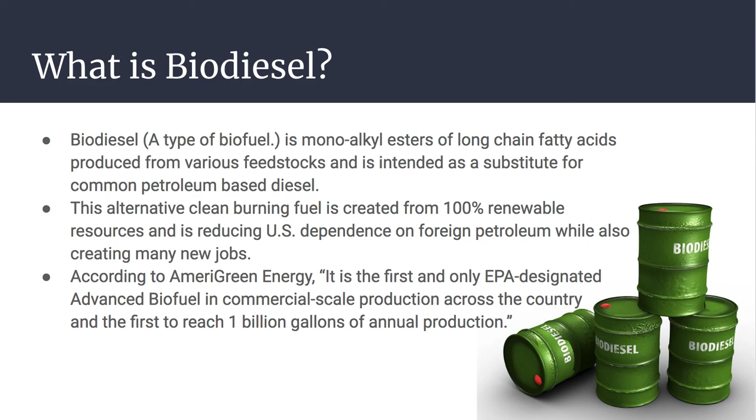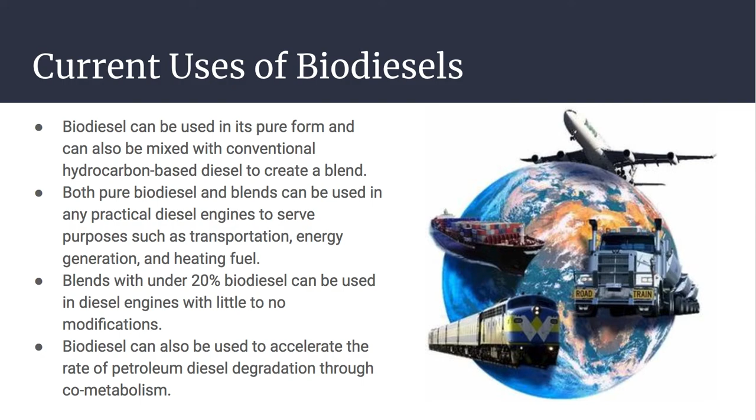Biodiesel can be used in its pure form and can also be mixed with conventional hydrocarbon-based diesel to create a blend. Both pure biodiesel and blends can be used in any practical diesel engines to serve purposes such as transportation, energy generation, and heating fuel. Blends with under 20% biodiesel can be used in diesel engines with little to no modification. Biodiesel can also be used to accelerate the rate of petroleum diesel degradation through co-metabolism.

Biodiesel is one of the easiest alternative fuels to use, and there is a variety of feedstock sources that can be used to produce it. These feedstocks include virgin oil, waste vegetable or cooking oil, animal fats, algae, oil from halophytes, and more. The waste vegetable oil discarded from restaurants is becoming more popular as a feedstock for biodiesel, and many supporters propose that waste vegetable oil is the best raw material for its production, but currently the worldwide production of vegetable oil as a raw material for biodiesel fuel is not abundant enough to substitute for the liquid fossil fuel version of diesel.

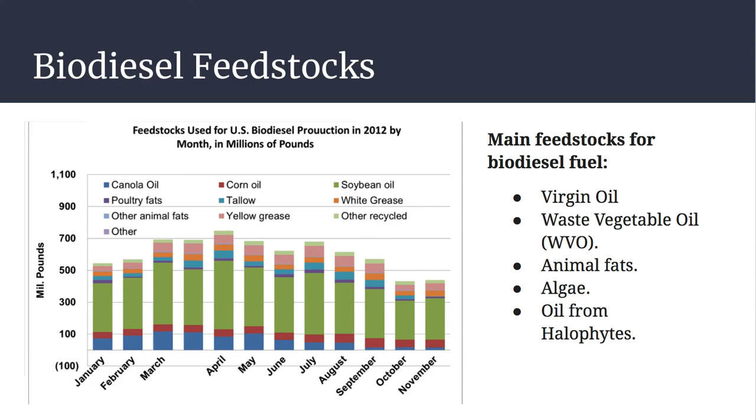Biodiesel is steadily increasing in production and consumption all over the world, with the United States in the lead, producing an average of 940,000 barrels a day compared to Brazil, who's in second, producing around 450,000 barrels per day. Consumption has seen a rapid increase from 2010 to the present, with the United States consuming a little over 2,000 million gallons in 2016.

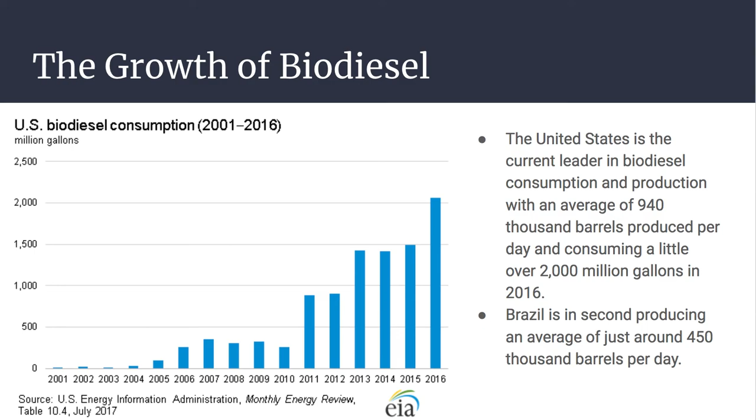The use of biodiesel is known for being environmentally friendly, which is true because of its decreased greenhouse gas emissions, overall lower pollution, and its faster biodegradation. This biofuel has been studied to have 45 to 65% lower greenhouse gas emissions than conventional petrol diesel, depending on the feedstock it was produced from. Biodiesel is also the only alternative to have effectively completed the health effects testing requirements of the Clean Air Act of 1990.

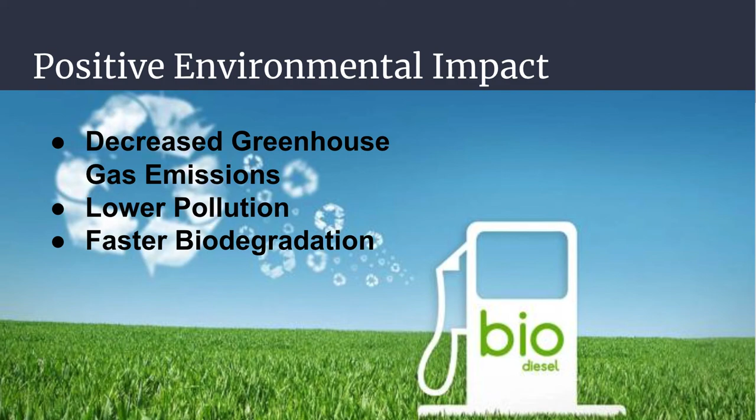Carbon dioxide gases are actually recycled through this process, and according to Berkeley Biodiesel, the plant feedstock used in the making of biofuel absorbs carbon dioxide from the atmosphere when it grows, and once the biomass is converted into biodiesel and burnt as fuel, the energy released is used to power an engine while the carbon dioxide is released back into the atmosphere. Biodegradation rates are also impressive, with around a 5 times faster rate than petroleum diesel studied over a span of 28 days, and through co-metabolism, biodiesel blends can assist and accelerate the rate of petrodiesel.

The only negative impact on the environment due to biodiesel production is deforestation. This occurs if deforestation and monoculture farming techniques are used to grow biofuel crops. Examples of this include tropic forests being cleared to make room for oil palm plantations. This can in turn damage biodiversity and ecosystems by threatening many species of plants and animals.

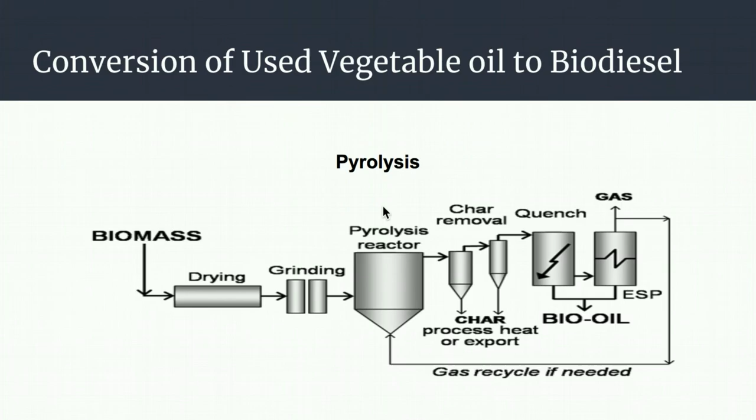Conversion of used vegetable oil to biodiesel is an important process for the production of biodiesel. Pyrolysis and transesterification are possible methods for conversion. Pyrolysis is a method conducted at a high temperature with or without the aid of a catalyst that decomposes plant raw materials or animal fats into a series of mixtures. Alkanes, olefins, dienes, aromatics, and carboxylic acids are the possible products.

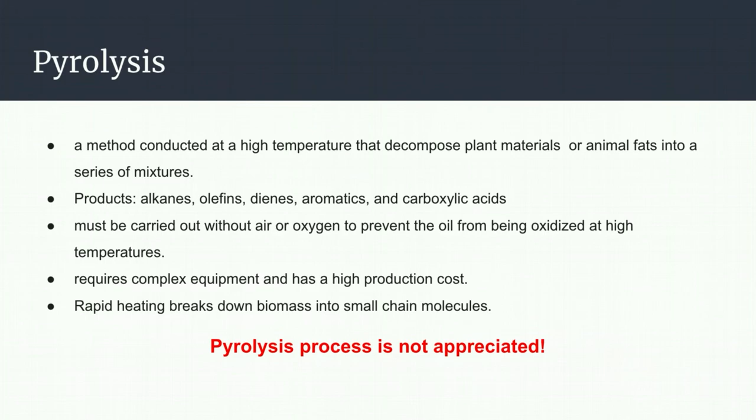This method must be carried out without air or oxygen to prevent the oil from being oxidized at high temperatures. The reaction conditions, such as rapid heating, break down the organic polymers in biomass into short-chain molecules, and these problems lead to the complex equipment and high production cost. Therefore, this method has not been appreciated by researchers due to its low conversion rate, high energy consumption, and poor economy.

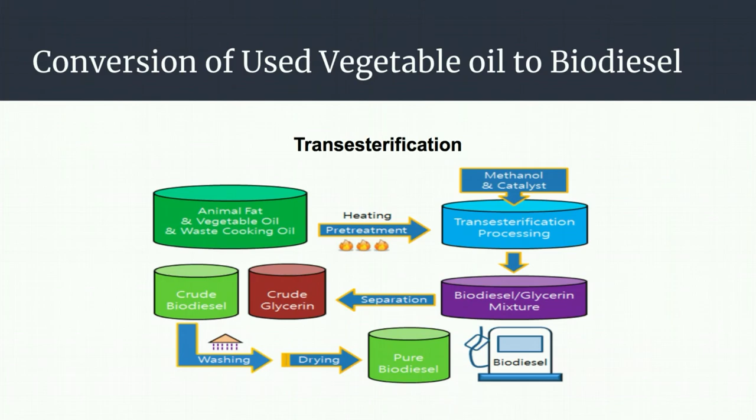Another method that is widely used is called transesterification. Used vegetable oil is first heated to remove impurities. Then they undergo a transesterification reaction in the presence of acid or base catalysts or other new catalysts. Finally, pure biodiesel fuel is obtained by washing and drying the corresponding fatty acid methyl ester or ethyl ester.

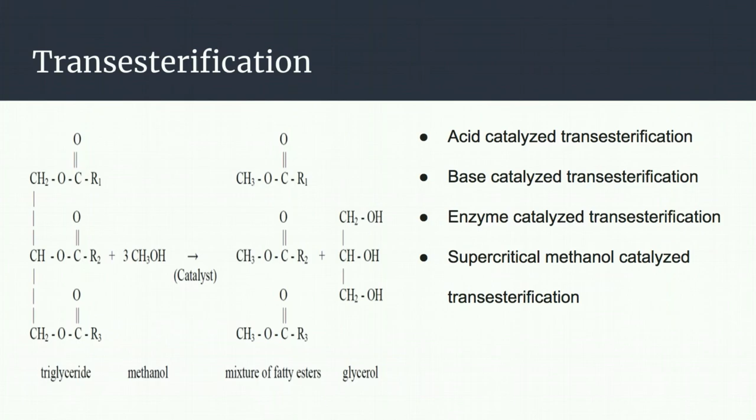The transesterification method can be divided into acid-base catalysts, enzymatic catalysts, and a supercritical methanol process based on the catalytic method. Although the esterification methods are different, their reaction mechanism is the same. The figure on the left shows the schematic diagram of transesterification mechanism. A triglyceride reacts with three molecules of alcohols in the presence of catalyst, producing a mixture of fatty acid alkyl esters and glycerol.

The acid catalyzed transesterification process is a catalytic process by using strong acid to catalyze esterification of free fatty acids. This process has very slow reaction compared to that of base, and it is possible for the high free fatty acids but produces water. Unburned hydrocarbons and carbon monoxide are substantially reduced, and sulfur dioxide emissions are eliminated.

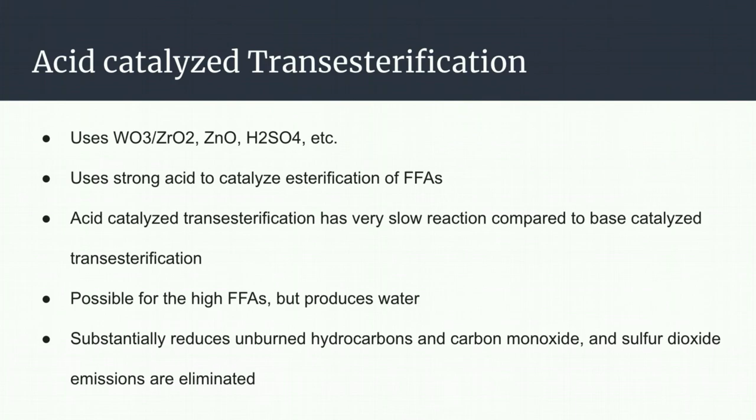The base catalyzed transesterification process is the most widely used technique. This process has faster reaction compared to that of acid, and this fast reaction leads to less corrosive. Recycling catalyst and possible formation of soap is challenging these days.

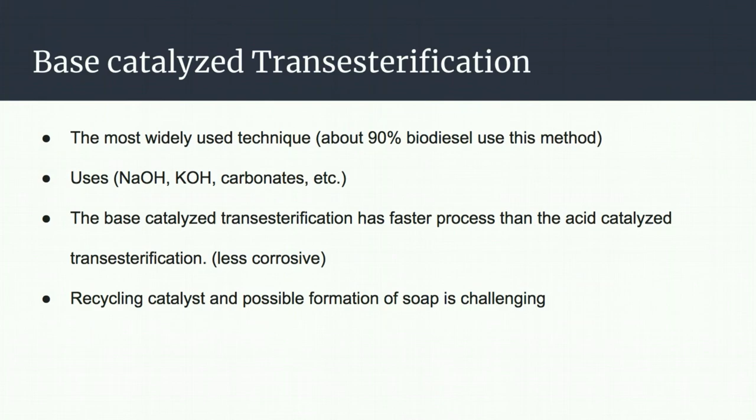The enzyme catalyzed transesterification uses enzymes to produce esters from triglycerides at relatively low temperature and pressure. It has relatively longer process compared to other reactions. The catalyst separation issues are solved easily, but the expensive catalyst is the disadvantage for this process.

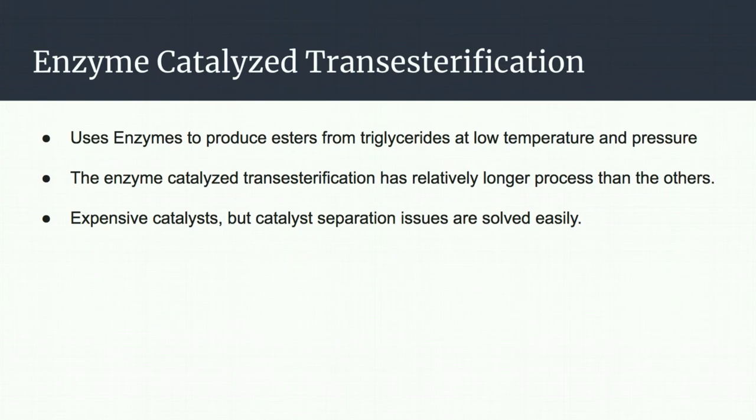The supercritical methanol process is a non-catalytic process. This process is an economical, efficient, and environmentally friendly method for producing biodiesel fuel compared with the conventional commercial method. Moreover, no soaps are generated, and separation and purification of the products are easy. Unlike the other methods, this method can also be applied to relatively long-chain alcohols due to the non-catalytic process.

Now I'm going to speak a little bit about the characteristics of biodiesel and how they compare to regular diesel. These characteristics include chemical composition and important fuel properties. For the chemical composition, HNMR spectroscopy tests for the presence of fatty acid methyl esters in biodiesel. FAMEs are what makes up biodiesel. IR spectroscopy is used to test for the presence of glycerol in the fuel. Gas chromatography coupled with mass spec determines the composition.

For the fuel properties, the most important fuel property to consider is viscosity. Other properties included are cetane number, heat of combustion, and the cold flow properties such as cloud point and pour point.

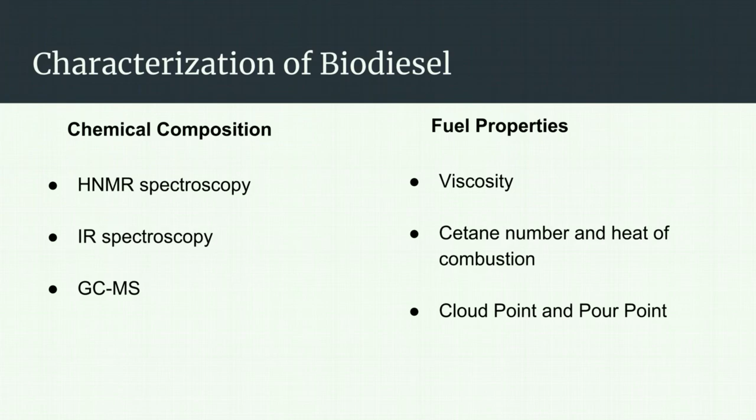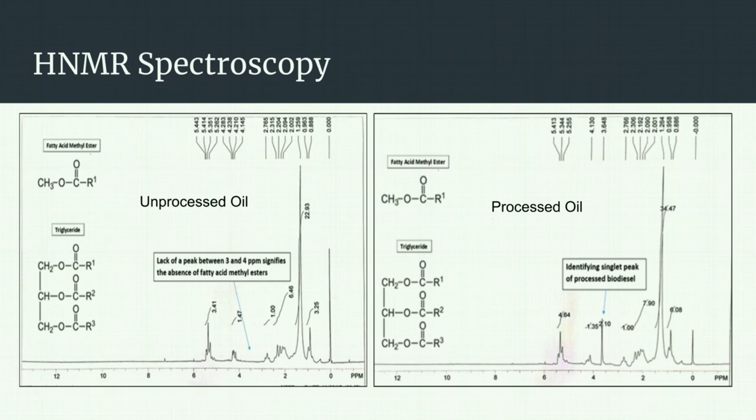These graphs here are HNMR spectra of vegetable oil before and after the transesterification reaction. This data was actually collected by me during a project in a chemistry lab. Both the processed and unprocessed oil have almost the same hydrogen setup, which makes it difficult to distinguish between the two. The only real difference between the two is the singlet hydrogen on the FAME, which exists only for fatty acid methyl esters and not triglycerides. This is the characteristic peak that proves the transesterification reaction was successful and biodiesel was formed.

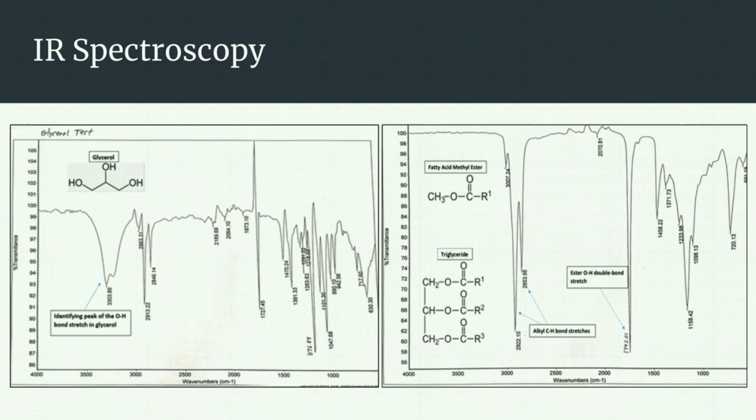In order to purify the product, the biodiesel mixture is centrifuged to remove the solid glycerol byproduct. The graph on the right is an IR spec of purified biodiesel. It's not very useful in determining if fatty acid methyl esters are created due to the similar structural nature of triglycerides and FAMEs. The graph on the left is an IR spec of the solids produced from the transesterification reaction. The graph very clearly shows the characteristic peak of the glycerol byproduct formed when fatty acid methyl esters are created. The data was also collected by me during a project in the chemistry lab.

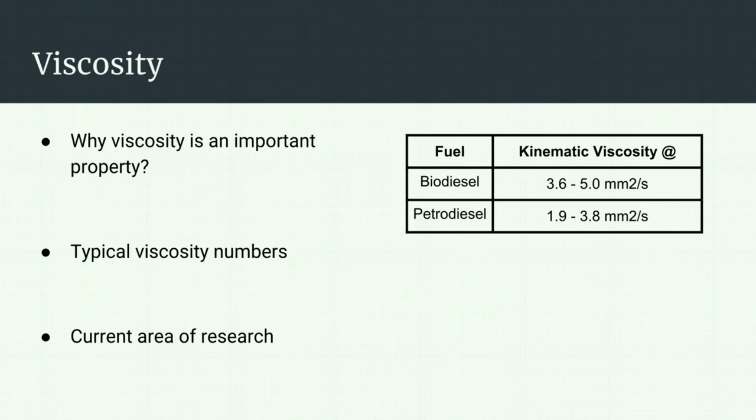As I mentioned before, viscosity is the most important property of biodiesel. It affects the operation of fuel injection equipment, particularly at low temperatures when the increase in viscosity affects the fluidity of the fuel. The typical viscosity of biodiesel is 1.3 to 1.6 times higher than that of traditional diesel. Lowering the viscosity of biodiesel without changing any of its fuel properties is currently a growing area of research.

Cetane number is a measure of ignition quality or ignition delay and is related to the time required for a liquid fuel to ignite after injection into a compression ignition engine. High cetane number implies short ignition delay.

The cetane number of biodiesel depends on the distribution of fatty acids in the original oil or fat from which it was produced. The longer the fatty acid carbon chains and the more saturated the molecules, the higher the cetane number. The broad range of cetane numbers for biodiesel commonly cause issues with the timing of engines.

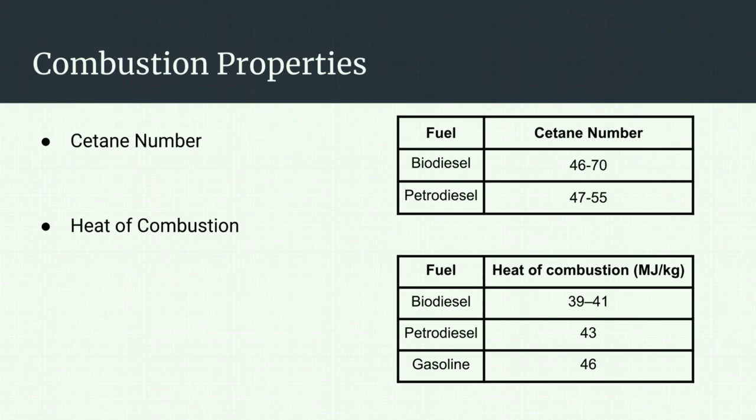The heat of combustion of a fuel measures the energy content. Higher is generally better. The table here shows the heat of combustion for biodiesel, regular diesel, and gasoline. The heat of combustion for biodiesel is slightly less than regular diesel. This is because biodiesel is an oxygenated fuel. This means it's a fuel with less energy but burns more completely.

Some of the cold temperature characteristics of biodiesel are cloud point and pour point. Cloud point is the temperature at which a cloud of crystals first appears in a liquid when cooled. Pour point is the temperature at which the amount of wax out of solution is sufficient to gel the fuel. Thus, it is the lowest temperature at which the fuel can flow.

Both cloud point and pour point are considerably higher than regular diesel. This is also a large area of research into biodiesel. For this reason, a fuel that is 100% biodiesel cannot be used in a combustion engine in colder climates.

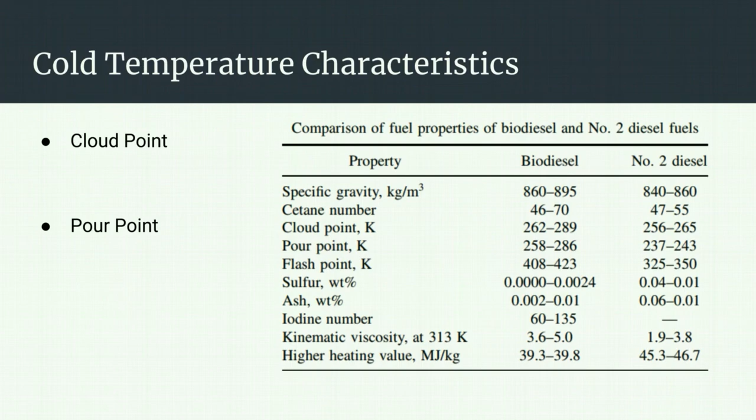Although there are many advantages both to consumers and the environment to using biodiesel, there are some disadvantages as well. One of the main advantages of biodiesel is that on average it is cleaner than fossil fuels. However, biodiesel does have about 10% more nitrogen oxide emissions than fossil fuels. This could cause an increase of both smog and acid rain in largely populated areas.

One big problem is that the oils in the biodiesel will turn to gel at around 40 degrees Fahrenheit, whereas diesel has a gelation point of around 4 to 13 degrees Fahrenheit. There are slight differences of the gelation point due to the varying compositions of biodiesel. The various compositions of biodiesel also pose more complications.

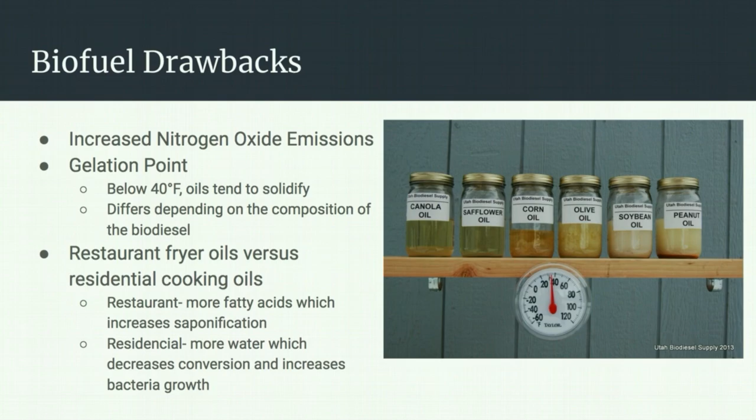For example, restaurant fryer oil contains more fatty acids that will increase the chances of saponification, or the creation of soap. Residential cooking oil, on the other hand, contains more water. An increase in water impedes the biodiesel reaction, which can lead to only a partial conversion of the oil into biodiesel. Water in biodiesel can also cause a decrease in the heat of combustion, an increase in bacterial growth, and deterioration of fuel system components.

Biodiesel can only be used in diesel-powered vehicles, and there are still a lot of complications when it comes to using biodiesel in a car. Besides the gelation point limiting the use of biodiesel to warm temperatures, there are also precautions that need to be taken in terms of the equipment in the car engine. Currently, cars are only allowed to use a maximum of B20, or a biodiesel diesel mix that contains only 20% biodiesel.

Degradation of rubber hoses and gaskets is another huge concern when it comes to using biodiesel in car engines. Biodiesel has been proven to be incompatible with both butadiene and nitrile rubber. Biodiesel also cleans dirt from the engine, which means that the filter must be changed after the first few hours of using biodiesel, so as to avoid a buildup of dirt and the clogging of a filter.

The ignition timing of a vehicle must also be adjusted, since biofuel mixtures and straight diesel have different compositions and therefore ignition temperatures. Biodiesel has also been known to lead to slightly lower miles per gallon than standard diesel due to the low energy content. Animal-based biodiesel averages about 10.6 less miles per gallon than petrodiesel.

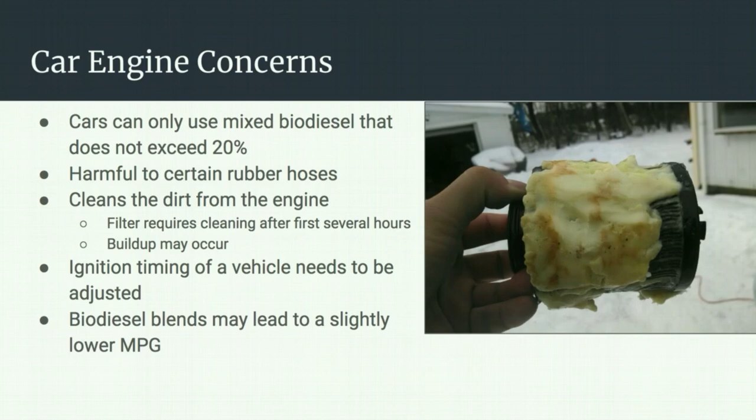There are several ways to combat these disadvantages. Fuel additives can be used in order to reduce the deposit levels. Cold flow additives can also be used in order to lower the gelation point, but these additives must be matched based on the composition of the fuel, which can mean more time, energy, and money.

Another possible solution is filtering or skimming off the gelatinous part of the biodiesel in order to separate it into various batches according to the temperatures at which they can be used without turning into gel. The last possible solution, as I mentioned previously, is biodiesel mixing. This can be used in order to lower the gelation point and decrease the problem with car engines.

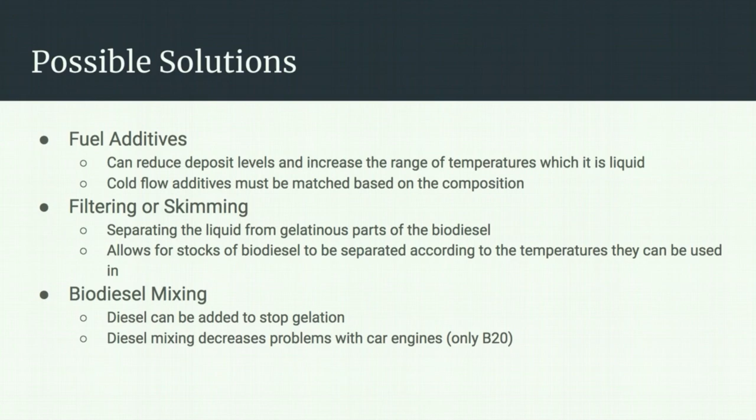The cost of feedstocks is a major restricting factor in the development of biodiesel because the most common commercial process of biodiesel production is homogeneous alkali catalyzed transesterification, using refined vegetable oils as raw materials. Each finished gallon of biodiesel produced will require slightly over 1 gallon of feedstock, either new vegetable oil or filtered waste fryer oil from restaurants.

Prospective biodiesel producers should consider the amount of fuel they hope to produce, and then be certain that they will be able to obtain and handle the necessary feedstock oil on a regular basis. As production volumes increase, the logistics of collecting large amounts of waste fryer oil might become more cumbersome. In addition, as more people produce biodiesel, there might be competition for waste fryer oils. Lastly, it should be noted that working with used cooking oil is somewhat more complicated than virgin oils due to the varying acidity, moisture content, and quality of used oil.

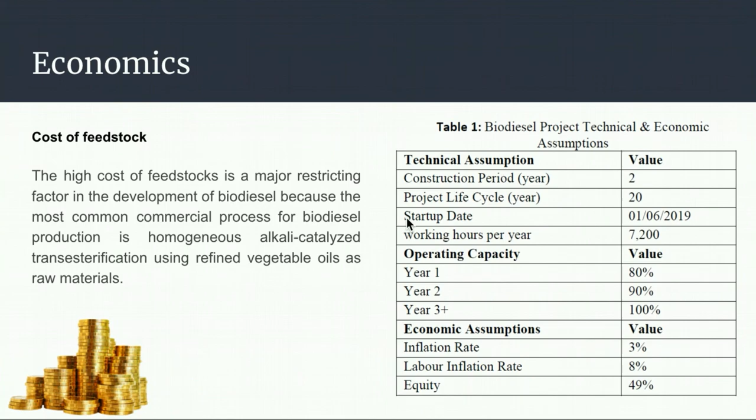The assumptions made for our product will be executed by 49% equity, 51% debt, with loan interest 9%, which is a high value, as in most products the loan interest is 6%, and the debt repayment period or payback will be 8 years. So our product is designed to process 101,000 tons of used cooking oil and 26,800 tons of methanol to produce 100,000 tons of biodiesel.

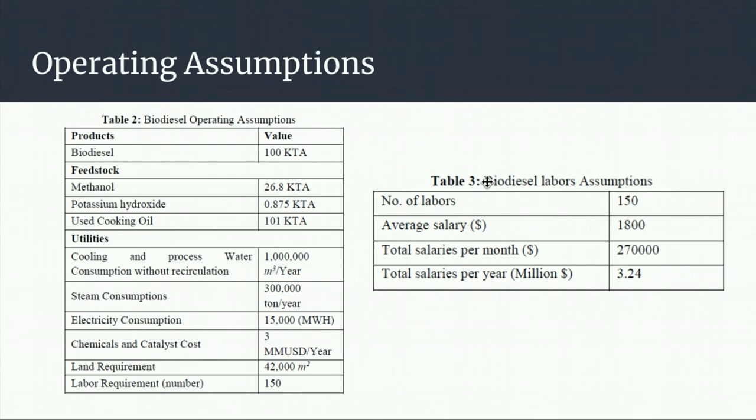Those were our assumptions. The amount of cooling water and process water used during our production will be at most 1 million cubic meters per year, and steam for heat exchanging will be around 300,000 tons per year. Our chemical cost will be at most 3 million per year and area of land 42,000 square meters, as shown in table number 2. For table number 3, what we did was just making assumptions for the number of laborers, like 150, and an average salary per month and per year.

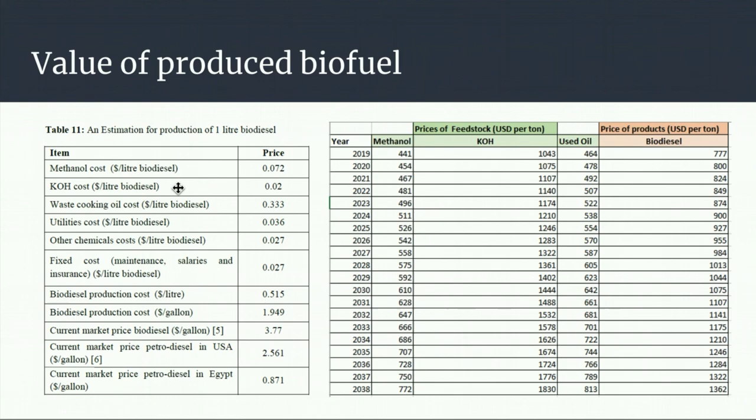Operating costs, as it can be seen, are the expenses related to the operation of the plant. It's divided into fixed and variable costs, and as described in the table, the fixed costs are those incurred whether the plant is in production or not, and are at a constant level regardless of the output produced, such as salaries or rents paid per month. And the variable costs vary at a rate directly related to the production of the plant. They are incurred only when the plant is in operation, although some costs, such as interest, are fixed costs, while maintenance and repair are considered variable costs.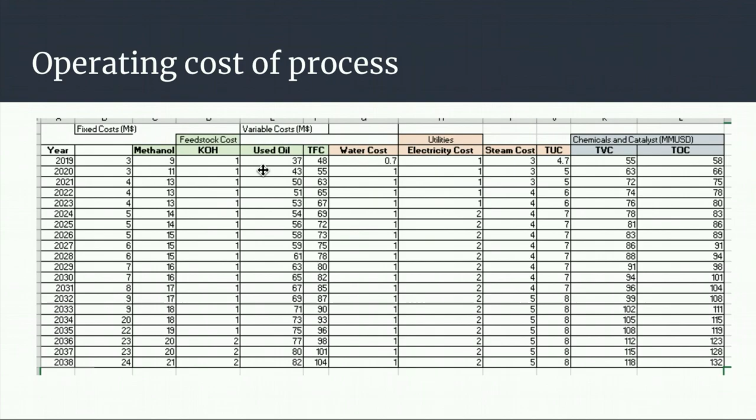As we know by now, the waste byproduct of making biodiesel is raw glycerol. This is the raw form of glycerin, which is used in many chemical applications from explosives to soap. Many people ask what to do with the raw waste byproduct, as commercially glycerin is distilled and purified by a high temperature, high pressure steam distillation process, which is well beyond the scope for most home biodiesel brewers. Now, we will see some uses of the raw glycerol product that have been used by others.

First, we need to know that glycerol is a major byproduct in the biodiesel manufacturing process, and each gallon of biodiesel produced has approximately 1/5 gallon of glycerol. And refining crude biodiesel glycerol into pure is not considered practical on small scales. So one of the uses might be that it can be useful for making soaps and animal feedstuff, and using glycerol as a feed ingredient for animals dates back to the 1970s. However, glycerol's utilization in feed has been limited by its availability.

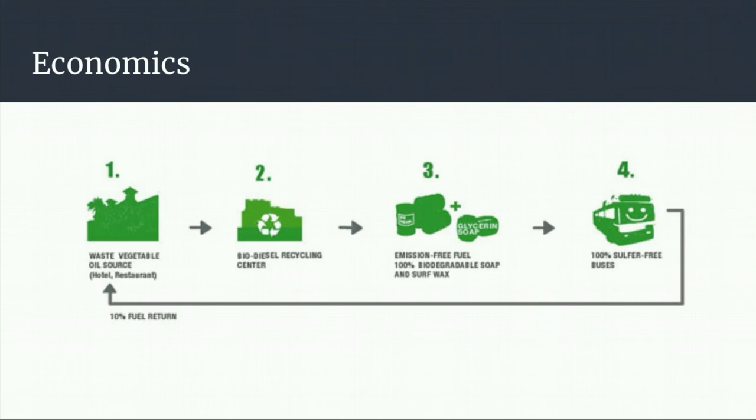Accelerating change into utilization of biodiesel from waste cooking oil will have a great profit and positive effect on environment, vehicle engines, independency on crude oil, investment in economy, as it will increase jobs and save foreign currency, especially that the consumption of biodiesel is very high, as we said before. For example, the consumption of biodiesel is like 13.5 million tons in 2014. It's imported 25% of diesel and 75% from local markets.

Vegetable oil is used directly in the field in either modified or unmodified equipment. It is referred to as straight vegetable oil (SVO) or pure plant oil (PPO). Many cars powered by a direct injection engine supplied by inline injection pumps are capable of running on pure SVO or PPO in all but winter temperatures. Principally, the viscosity and the surface tension of the SVO or PPO must be reduced by preheating it, typically by using waste heat from the engine or electricity. Otherwise, poor incomplete combustion and carbonization may result.

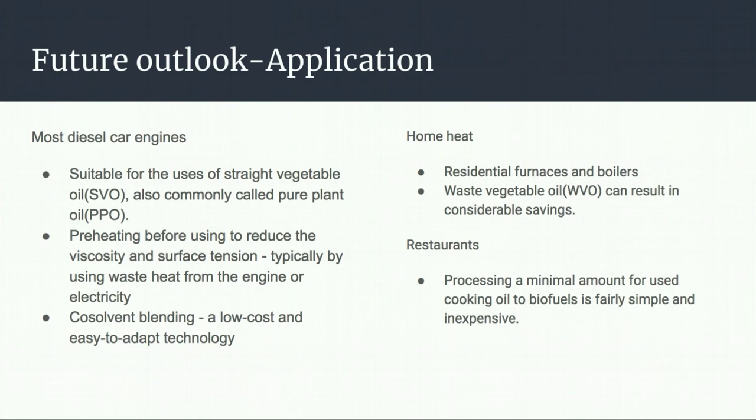Co-solvent blending is a low-cost and easy-to-adapt technology that reduces viscosity by diluting the vegetable oil with a low molecular weight solvent. Many restaurants will receive a minimal amount for their used cooking oil, and processing to biodiesel is fairly simple and inexpensive. Recycled vegetable oil, also termed used vegetable oil (UVO), waste vegetable oil (WVO), or used cooking oil (UCO). As of 2000, the United States was producing in excess of 11 billion liters (2.9 billion US gallons) of recycled vegetable oil annually, mainly from industrial deep fryers in potato processing plants, snack food factories, and fast food restaurants.

Virgin vegetable oil, also termed pure plant oil or straight vegetable oil, is extracted from plants solely for use as fuel. In contrast to used vegetable oil, it is not a byproduct of other industries, and thus its prospects for use as fuel are not limited by the capacities of other industries. Production of vegetable oils for use as fuels is limited only by the agricultural capacity of the given economy. However, doing so detracts from the supply for other uses of pure vegetable oil.

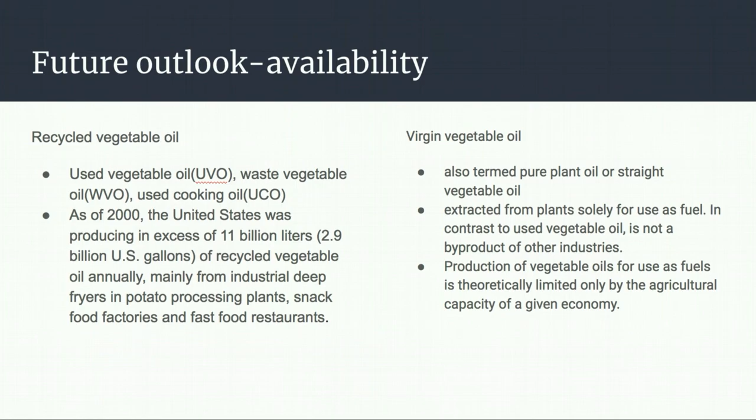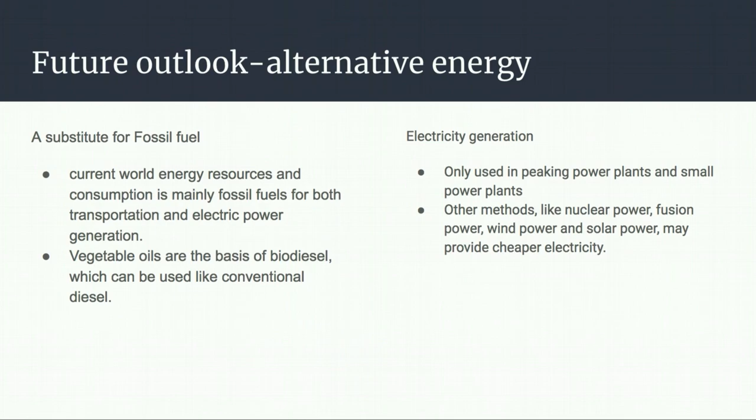Vegetable oils are increasingly used as a substitute for fossil fuels. Vegetable oils are the basis of biodiesel, which can be used like conventional diesel. In electricity generation, it's only used in peaking power plants and small power plants. Other methods like nuclear power, fusion power, wind power, and solar power may provide cheaper electricity. Germany used to have 0% taxation, resulting in it being a leader in most developments of the fuel use. And it is illegal to produce any fuel if it is to be sold unless a license to do so is granted by the federal government in Australia.

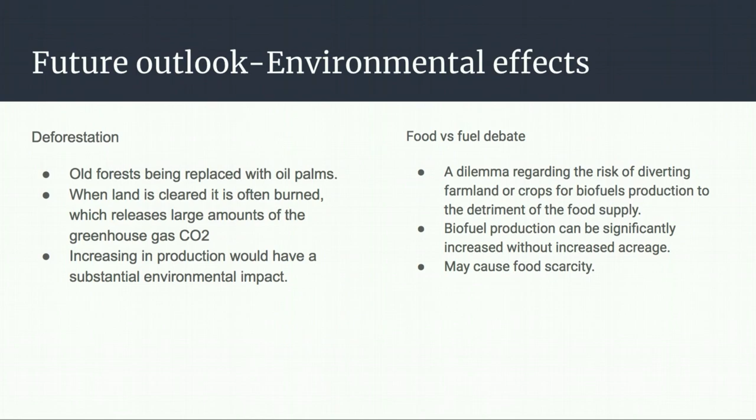There is a concern that the current growing demand for vegetable oil is causing deforestation, with old forests being replaced with oil palms. When land is cleared, it is often burned, which releases large amounts of the greenhouse gas carbon dioxide. Food versus fuel is a dilemma regarding the risk of diverting farmland or crops for biofuels production to the detriment of the food supply. Several studies do show that biofuel production can be significantly increased without increased acreage, therefore stating that the crisis at hand relies on the food scarcity.